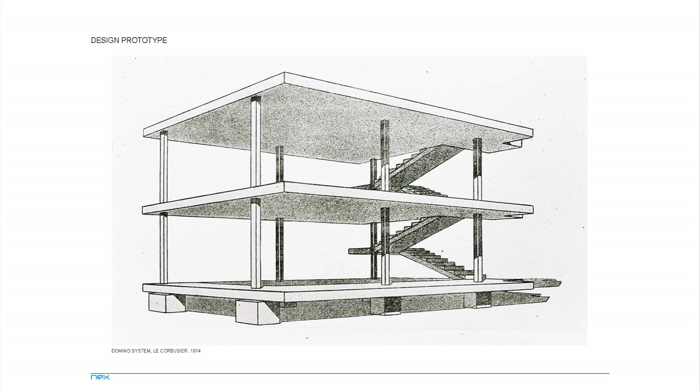It's, of course, Corbusier's Domino system. For us, these kind of models reflect a design, spatial, organizational interest we have, but remain abstract enough to be used in a number of different ways. Most importantly, I think for us, they give us a way to structure an architectural agenda in the office that can guide us beyond an understanding of design as a contingent solution to a specific one-off problem. It's a way of structuring an interest across a number of projects that gets us beyond just solving immediate design problems, or seeing design as a problem-solving exercise.

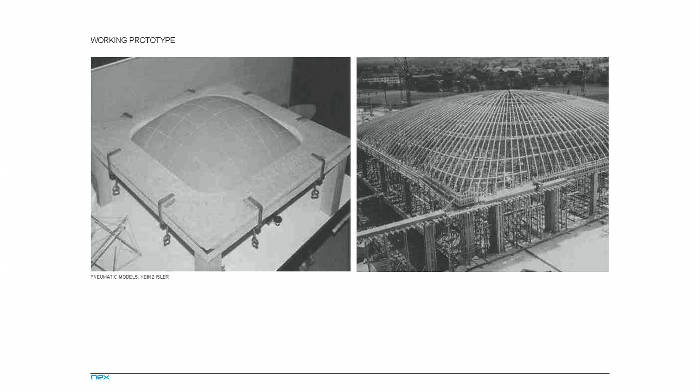Our second use of the prototype occurs during the design process itself, and I've tended to call this the working prototype. For us, it can be either digital or physical. The physical prototype, which I think Heinz Isler has a history of producing remarkable examples of, doesn't necessarily have to be full-scale models, but has to have a specific attribute that can be directly calibrated or correlated to a full-scale one-to-one installation.

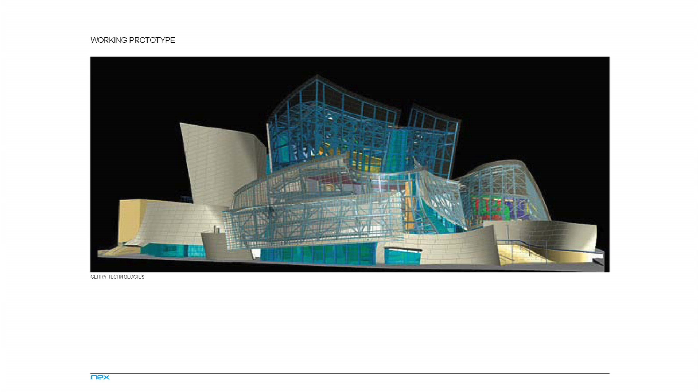In this case, he was using pneumatic models literally as a form-finding process. Of course, the other more recently familiar type of working prototype is the digital one, and that's just a relational model where the relations or performance of the model is in some way calibrated to the performance of a full-scale model. Gehry Technologies have pioneered the use of that in architecture, but again as a direct technology transfer from other industries.

So I want to talk about 3 projects and how we've developed this idea of the design prototype and the working prototype. One of the areas of research we're very interested in is developing knowledge and skills in modern methods of construction, specifically relating to digital design, manufacturing, and architecture.

Underlying that is an ambition to create exceptional or extraordinary spaces, assemblies and components, but with very ordinary means. So really the challenge for us is how do you create very bespoke designs or systems that match or exceed standardized options in terms of quality, cost and performance.

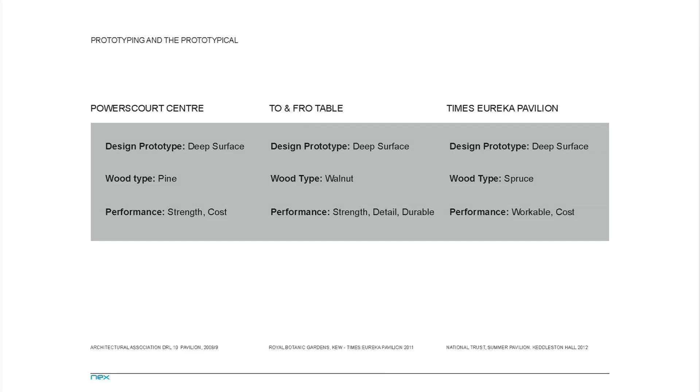A second thing these 3 projects have in common is an interest in the use of wood, mainly because of its technical versatility, but also its good environmental profile. And I think we felt there was just an unexplored potential in terms of its aesthetics.

So the first project I want to look at is called the Powerscourt Centre in Dublin. It's an 18th century listed building in the city centre, taking up an entire city block — basically a 4-story townhouse surrounded by an annex and a courtyard at the centre.

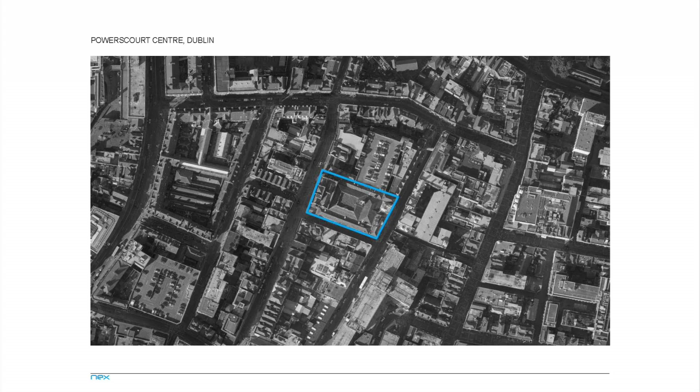It's Grade 1 listed, and our role was to analyse the building and develop contemporary proposals for it that, in one sense, restored the building and its qualities to what they were, but also improved its operational and environmental performance.

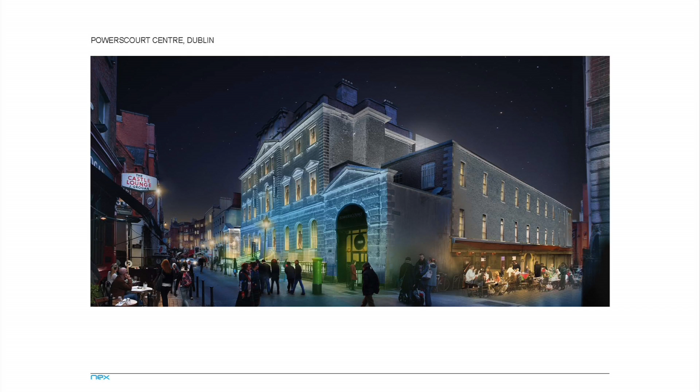I'm not going to go into detail, but the reason I bring this project up is because it begins an example of how we use these two ideas of the prototype. The one we were interested in here was an inquiry into the surface, or the nature of the architectural surface.

We explored this as a way of making the surface deeper, a bit more complicated, almost particleized — a way of breaking it up and thinking of the surface as an assembly of a large number of components.

So with this idea, this concept of the deep surface gets deployed across a courtyard roof initially.

The tectonic of the roof arose from a desire to create a non-institutional quality of light in this space, something very variegated that echoed the rhythm of the fenestration in the facades. So in some places there's a fine, even, diffuse background lighting of shade and shadow, while in others it's punctuated with clear glazed openings bringing in strongly contrasting light.

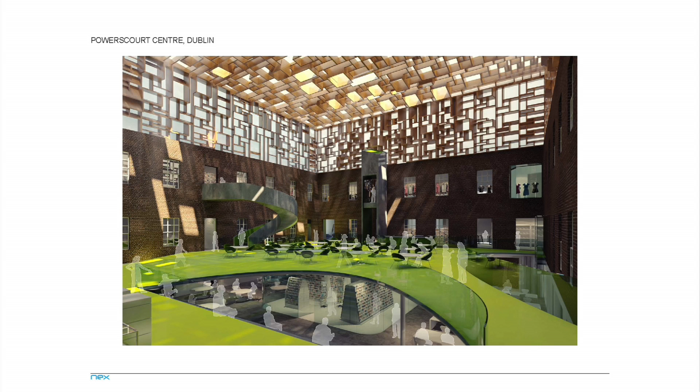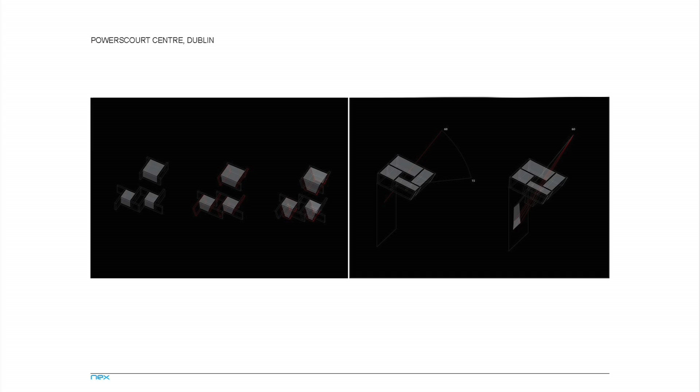We looked extensively and built models studying sunlight penetration into this courtyard, because it effectively had east, south and west light, so it got a huge amount of solar gain during the year.

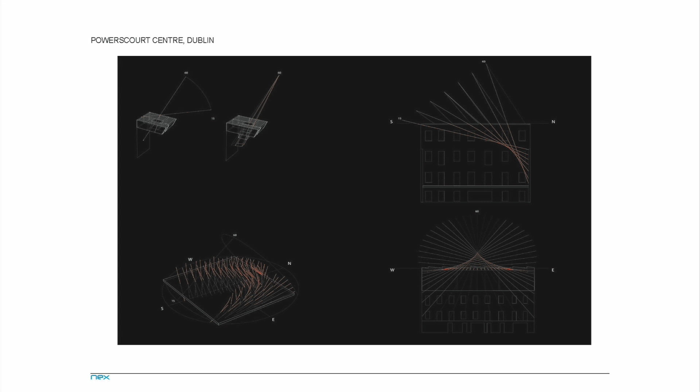So the challenge was developing models that could limit the solar gain while also creating a dramatic introduction of sunlight into the system.

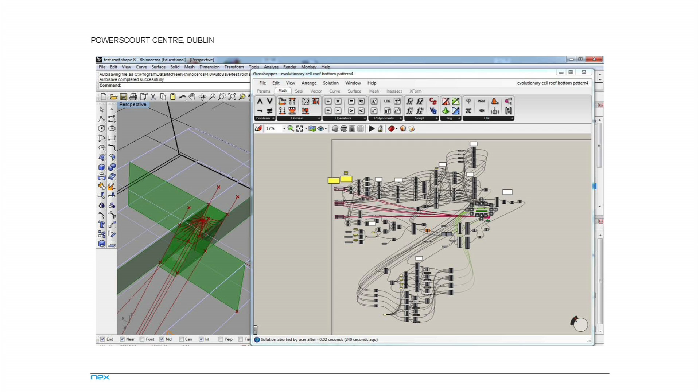This model here — we began by just looking at a number of apertures. Really what it was doing was finding the best place on this overall courtyard surface to put windows, so that we would get sunlight on the walls rather than on the floor.

This kind of working prototypical model was really almost like a form-finding, or a position-finding, process in the case of this study.

Structurally, we had a very interesting challenge as well. We had to span 28 meters and didn't really have any room to offload beams of any size — I think the maximum we could fit was a standard truck, because it was the city centre and there was nowhere to assemble anything.

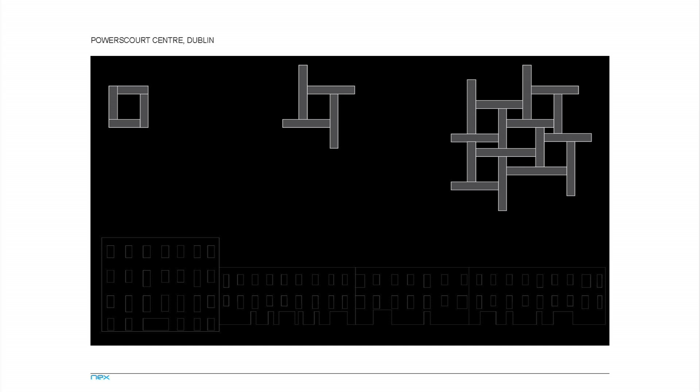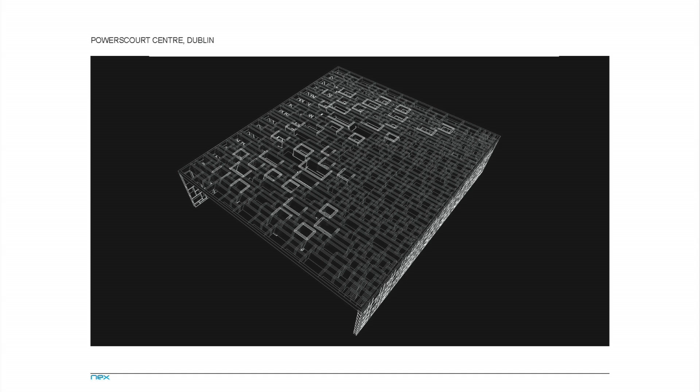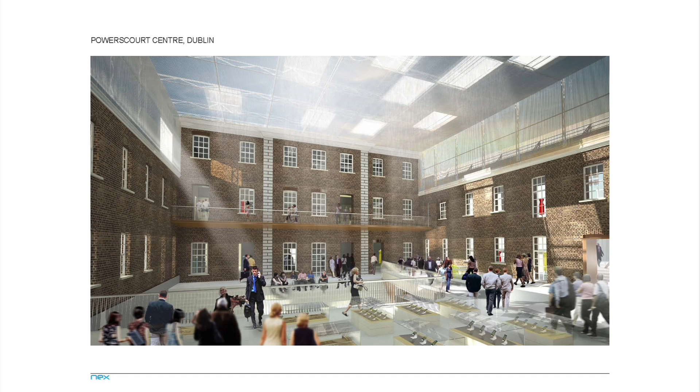As we tested this through a lot of structural models, it became apparent that it's just not going to work, certainly not in timber. The beams became so large to deal with the loads that the visual effect of the structural requirements became too heavy and also overloaded the perimeter walls of the building. So we ended up translating that into a steel structure with very similar principles to reduce the load. It's a solid Macalloy steel structure.

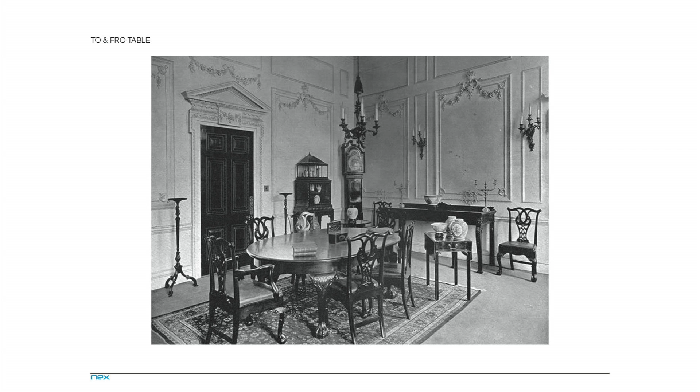Around the same time, we entered a competition for a table, strangely enough. It was run by the Technology Strategy Board and a digital manufacturing facility here in London called Metropolitan Works. The award was that they would assist the winners with developing a piece to pre-production stage and prototyping it.

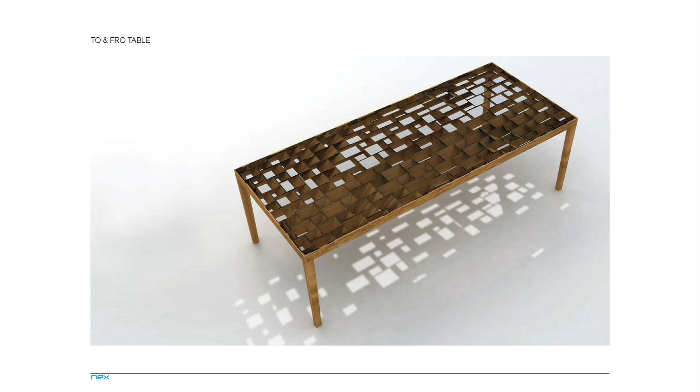For me, I was very interested in this idea of the table as a kind of social space, a very intimate social space, and really questioning again this idea of the status of the surface. In some sense, we think about what we say as making up most of what we communicate, but evidently it's only responsible for a very small part of it, and gesture and posture and other things actually communicate far more directly what we mean and intend. I was interested in this idea that maybe this surface is a little less emphatic in the way it separates above and below, and maybe it becomes something with a slightly more nuanced quality that would engage in this kind of social game, let's say.

So we basically took this design prototype of the roof and literally shrank it to the size of a table and said, what can we do? How does this develop or become installed at another scale, in another context?

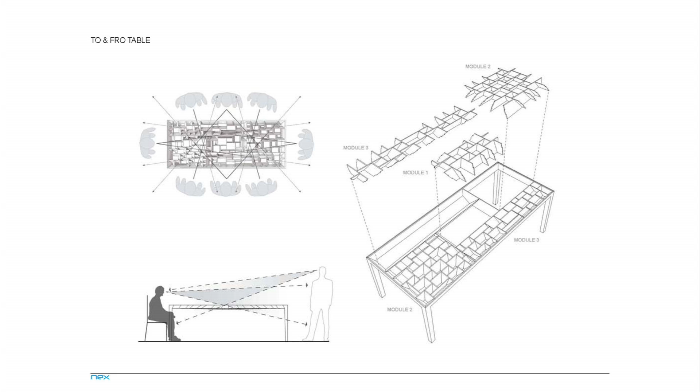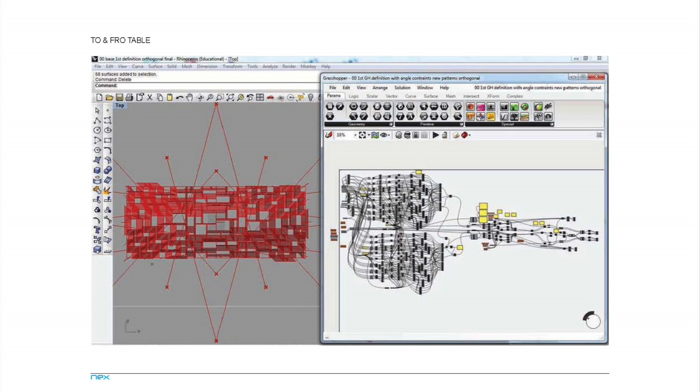So in this case, the form of the lattice was defined not by environmental conditions but social ones. Instead of sunlight studies and penetration, we were really looking at the penetration of the gaze, and the way people sitting around would see through certain parts of the table opposite but not immediately in the vicinity of them. The whole model of this lattice was set up according to those rules. So what you get is a very intricate field of about 500 or 600 pieces of timber that vary to and fro in relation to the way people view and see this table.

That kind of complexity, that subtlety in this lattice really demanded an awful lot of prototyping. The tectonic logic of the system in this case was at such a small scale that it was quite easy to deal with. It was a very simple mortise and tenon joint, which is a kind of centuries-old technique.

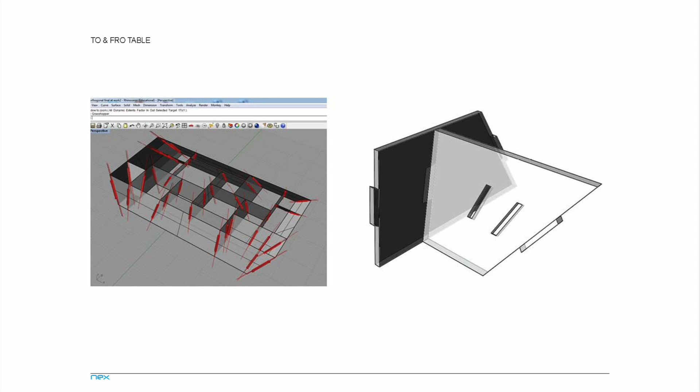What arose through this, because of the variety within the system, was that each piece only had about 2 instances of being the same. So on the one hand, you're dealing with a very traditional craft technique, but on the other, there's an immense amount of complexity in dealing with all of these different angles and developing a system that could accommodate and cope with that.

Materially, we selected walnut because it's strong and can take a very fine level of detail, which as a furniture piece it required. We ended up having, in the center, these fins that were about 6 millimeters, which even in walnut still warped as it was cut by the machine because it alters the tension in the fibers.

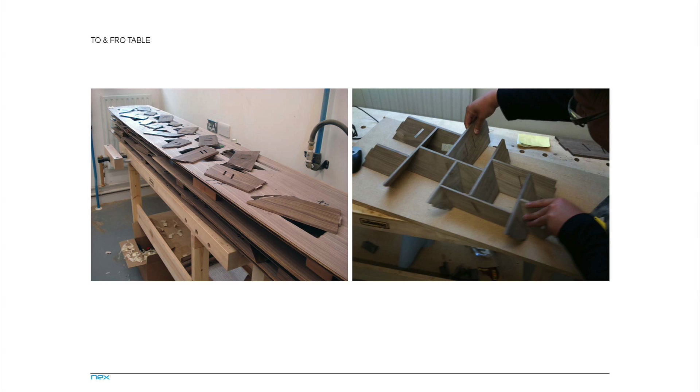So we ended up building these central pieces out of a kind of 3-layered laminate of walnut to give it stability. These were basically assembled in much the same kind of logic, this growing reciprocal structure, which you can see on the right there.

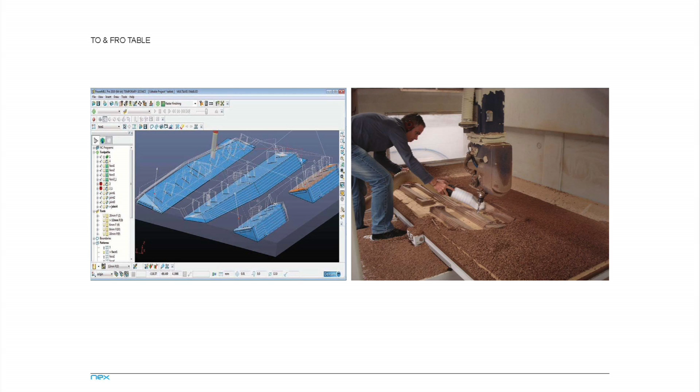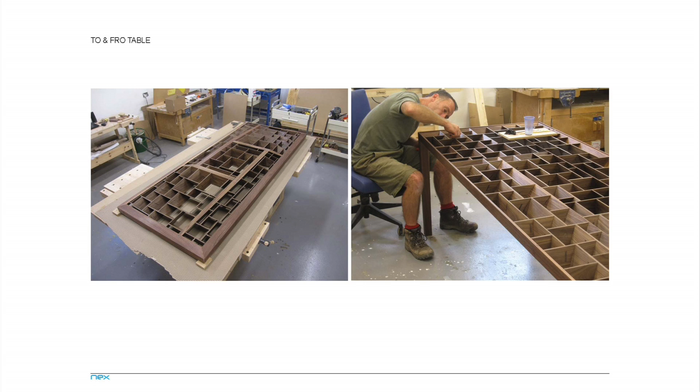And that reciprocal structure, we introduced this other idea of a kind of recursion. The same game of the reciprocal structure happens at a larger scale, so it happens at the scale of the individual small piece and at a slightly larger scale, which you can see being machined here, and on the underside there. What that did is it helped control the dimensional creep over the whole piece and also helped with the assembly. I think the assembly took about 3.5 days with a skilled craftsman.

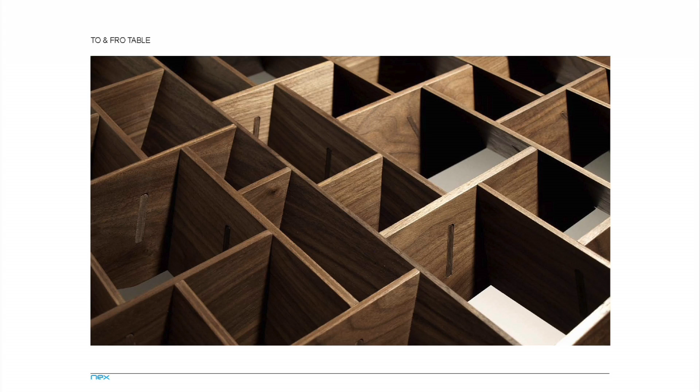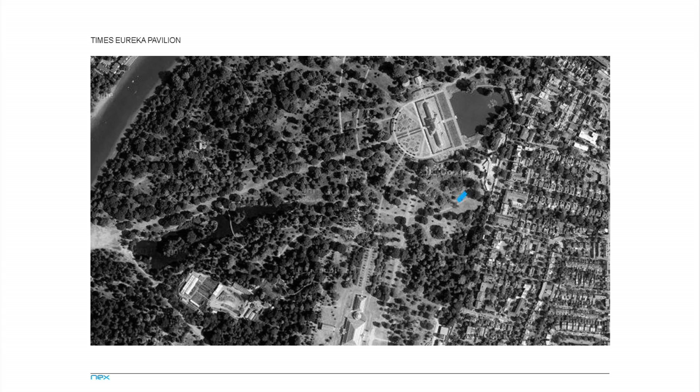So finally, to take this design prototype into another context entirely, this was an experimental project we did for the Times newspaper and the Royal Botanic Gardens at Kew a couple of years ago. The brief was really a garden and pavilion that explored the significance of plants. All of the plants in the garden were selected for their medicinal, commercial, or industrial uses. So the pavilion had to be a reflection of that.

But for us it also offered a very interesting opportunity to explore a question about the relationship between the natural and the artificial. It also offered an opportunity, in the context of Kew, to explore the typology of a pavilion—Kew is full of these things. What's striking about all of them is the importance of their silhouette as an object sitting in an 18th century landscape, and that they're a kind of destination and a device for framing the landscape once you're inside them.

So the structure we designed was intended to be a counterpoint to that in two ways. Firstly, we wanted it to be enmeshed with its surroundings through its siting and the texture of its surface. And secondly, it wasn't really a destination—there was actually a route through it, so it was meant as a much more dynamic space, one that filtered its surroundings rather than framed them.

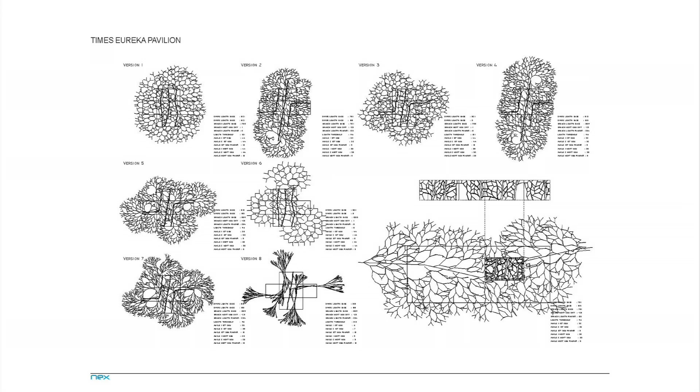In the first scale here, we used two types of recursion processes. The first was an L-systems process, which is basically a mathematical way of describing a process of branching—the growth of a tree, for example, or the way any natural biological or plant form would branch. There's a mathematical way of describing that, so we looked at that in a number of cases and varied things like the length of the branch, the angle they divided at, etc.

What we found was that it gave us a kind of primary structuring of this space, this garden, but it couldn't infill between the branches. For us, it gave this one-to-one correlation between the scale of the project and the scale of what was around it. So the scale of the branching was almost the scale of the trees around the building, and that's something we really wanted to avoid.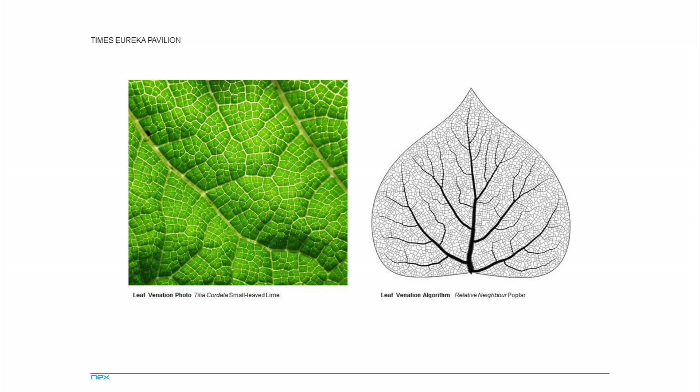So we left that and began looking at something much smaller. I thought it was important that the pavilion itself could communicate the sensation of biology at a very unfamiliar scale for an experience. So we looked at some work on mathematical modeling of leaf venation, which for us was a much more productive way of thinking about it. In the end we selected a Voronoi process, which doesn't strictly model biology, but has many of the qualities you see in biological systems.

We started this process of repeated action at a number of scales—the first iteration gave us a set of points producing about 21 large cells, and that became the primary structure of 140 millimeter timber beams.

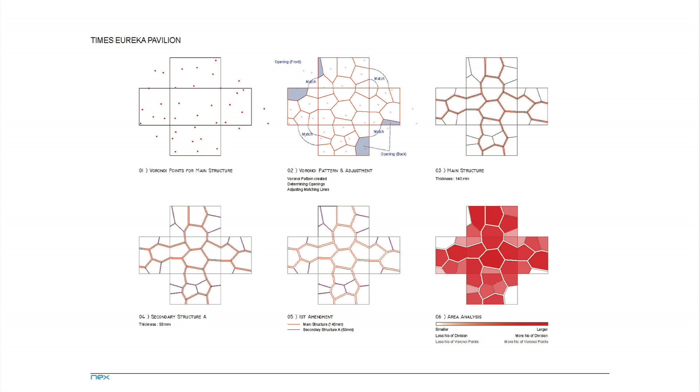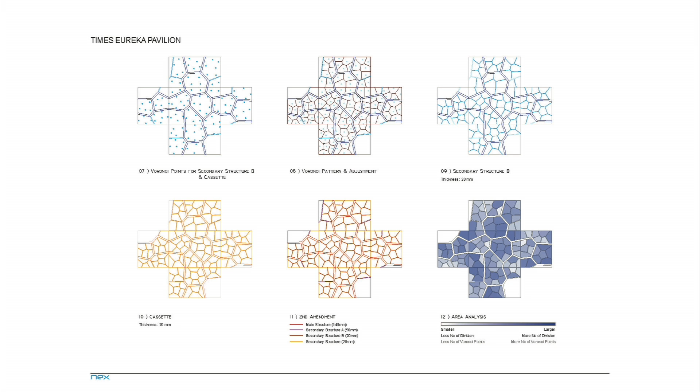The second one within that then gave us a whole set of smaller cassettes, if you like, that were made out of 20 millimeter boards. And I think there was about 126 of those.

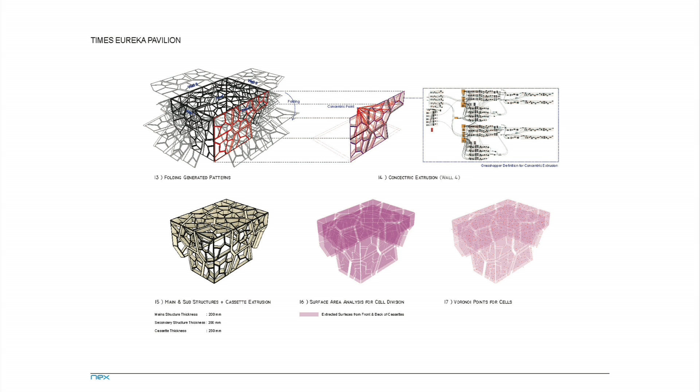Once we had that, we basically wrapped this pattern over the boundary that we were given for the pavilion. It was something already predefined. One thing we added at that point was really thinking about how this pattern would become spatial, would become deep, and would become this deep surface.

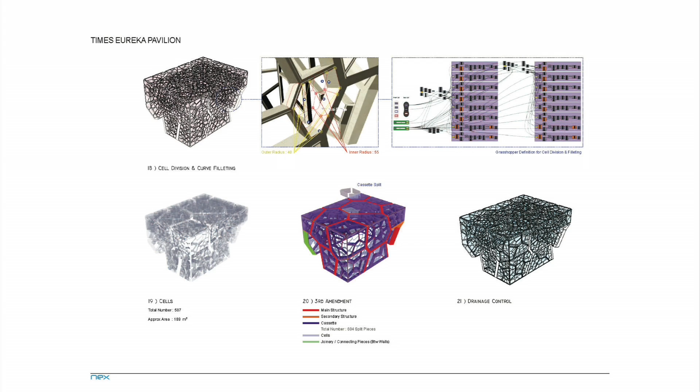Rather than just extruding everything backwards, we projected everything to a center point, which really centered the experience of being inside this pavilion in a much more dynamic way—everything went back to a single vanishing point. So standing in the center of it, it seemed that everything radiated out from you. While that really increased the sensation of being inside the pavilion as a kind of dramatic moment, it obviously created quite a lot of additional complexity in the manufacturing.

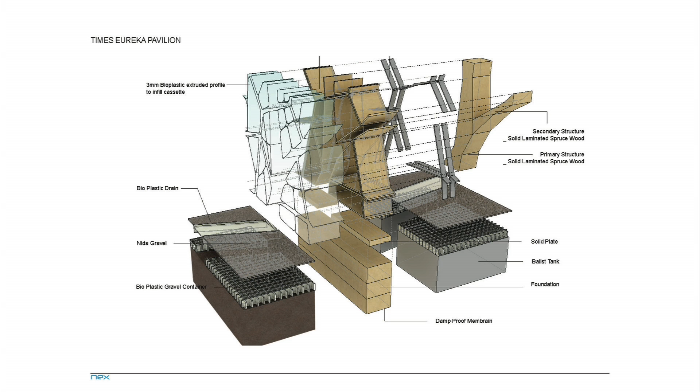Within those 126 cells, we then did a third process of division, and that produced about 587 final cells. They were produced in a recycled polypropylene, a sort of flat sheet technology material that we could just fold up into a 3D form.

That's basically the whole system there—that's a piece of it, how it goes together. You have the primary structure, which are the large beams, the plate cells or cassettes which were 20 millimeter board, and then these fine infill cells.

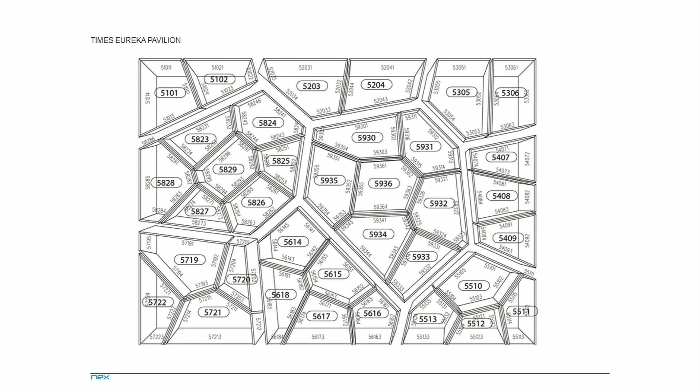The really amazing thing about this whole idea of repeating this recursion process was that, just like a plant, every single cell was unique. So through obeying a few simple rules, every single outcome was different—every cell was different, every piece of timber was different.

That obviously, to be viable, both in terms of managing the number of pieces and from a cost point of view, meant an entirely digital workflow and a file-to-factory process. So the model actually was the entire construction document.

That was sent first to the timber manufacturer, and then we were the ones coordinating with the plastic manufacturers and the assembly people. To get to that point, there was a process of very intensive prototyping, both digitally and physically. Here you can see, just studying how these elements work, that we can achieve the level of detail and precision we want.

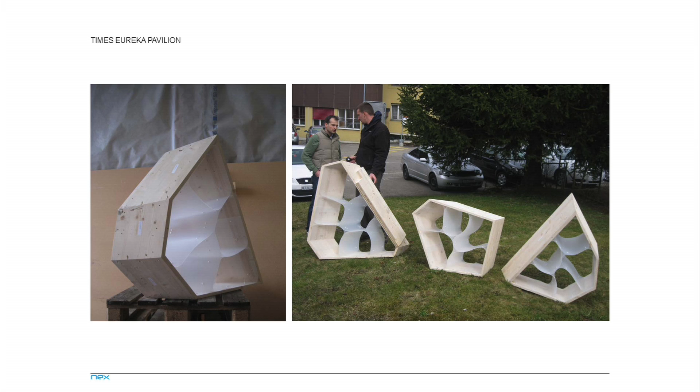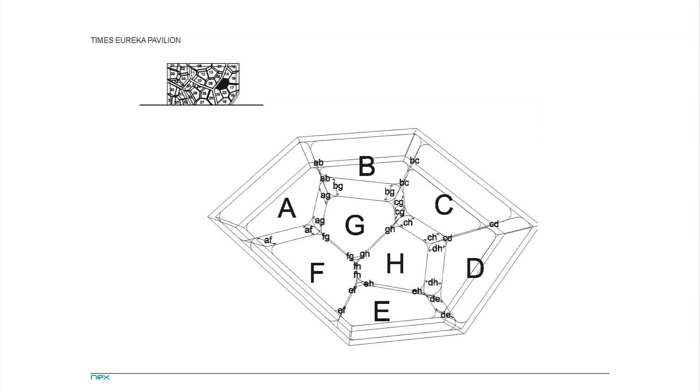The infill cells were really done quite simply using a basic sign cutting technology, and just a set of instructions about how to connect them together before they were put into each timber cassette. So that's basically what we produced for each one—a kind of flattened out shape that gets cut, and then this gets assembled and clipped together.

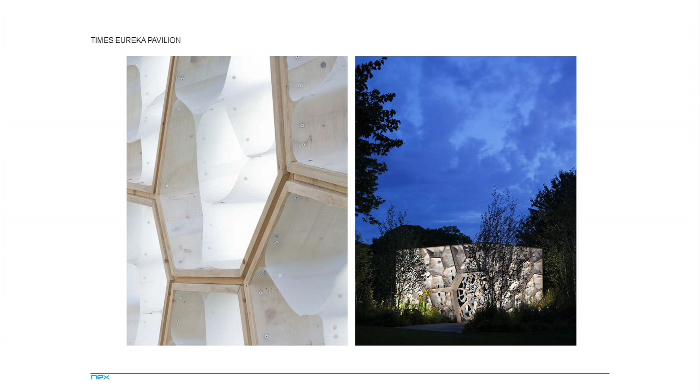And that's the finished project in Kew there. So you can see the inside there, that basically the corners disappear, everything is at sort of 45 degrees and radiates out from the center.

So I'd like to close by saying, I think these projects, in a way, have shown you the two ways we work. Our work with the idea of the prototype, with the idea of the prototypical as a design prototype, and prototyping is a central part of our process.

I think that the change and the developments in computer-aided manufacturing and cheap digital fabrication processes are actually really fundamentally changing the way we work, where we can bring an idea of prototyping that has traditionally existed for a long time in other industries into architecture in a very cost-effective way, where we don't need closed supply chains or massive investments in upfront testing. And I think that's actually quite a fundamental change.

And for us, it starts to shift us from a model of design, test, and redesign to something that's much more about being able to test conditions very early on and actually develop a design that's much more likely to be closely fitted to possible constraints. That's a very different model to any of the models that have existed in earlier prototyping within architecture.